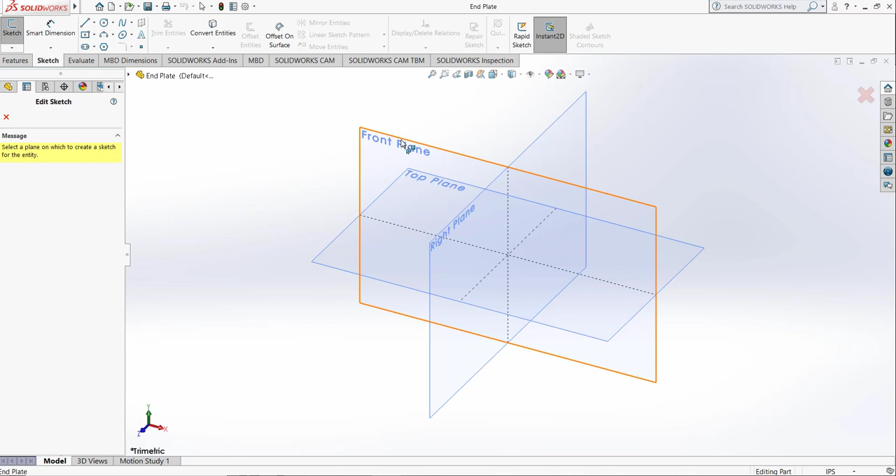Start the sketching and I am going to select the front plane, and then go to corner rectangle, and draw a rectangle like that. This is a simple work.

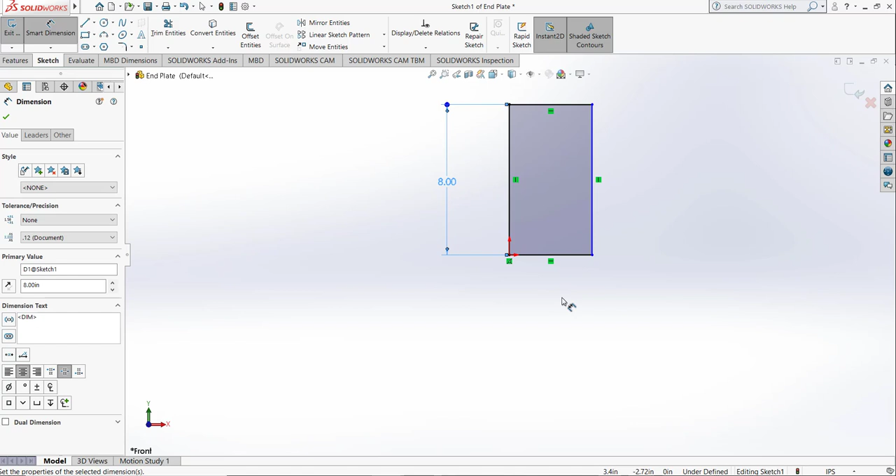Then add the dimensions. So this dimension is given as 8 inches, this dimension is 3 inches, and 2 circles we are going to draw, and then assign the dimensions.

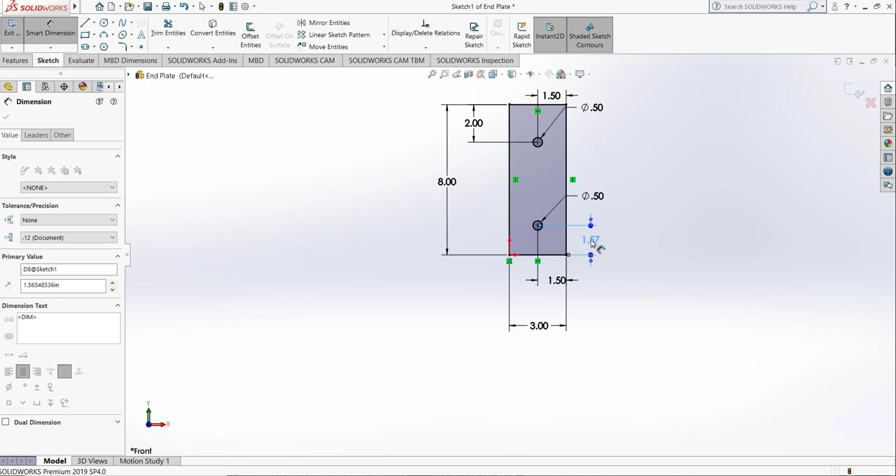So our sketch is complete. Exit the sketch, go to features and use the extrude base boss, and this dimension is given as 0.5 inches. Check mark, and the end plate design is done. Save it, and then we are going to create the drawing from this part.

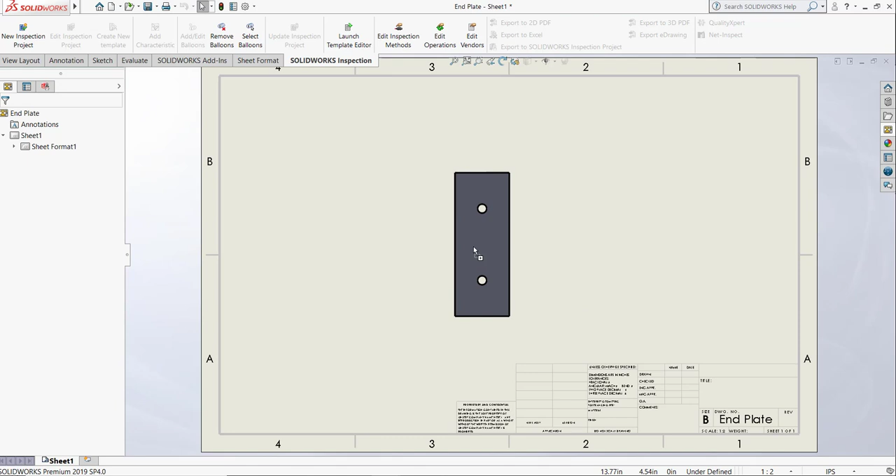I am going to select the B landscape, click OK. I am going to select the front plane and then right plane. When I move my mouse here, I am going to put the isometric view here and just drag this view, keep it here and change the display style.

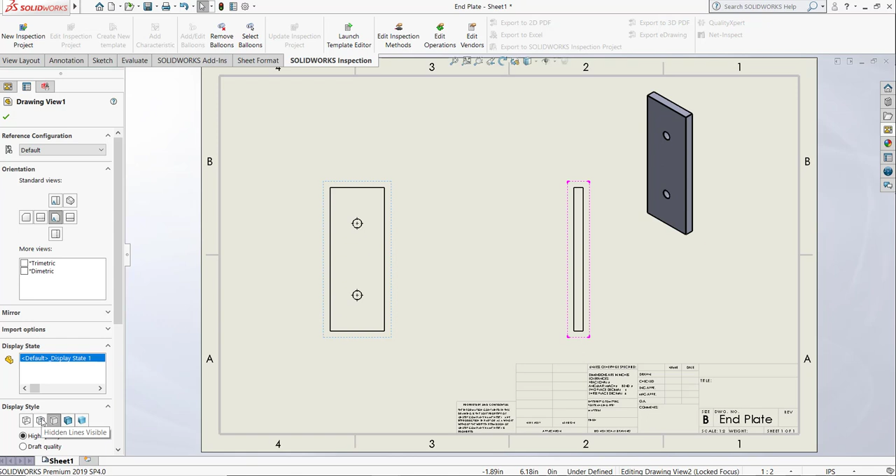Just drag it here, select this view and make the hidden line visible display style, and go to sketching, smart dimensions, and just dimension the design.

So we just made the drawings of end plate. Save it. Now this end plate design is done.

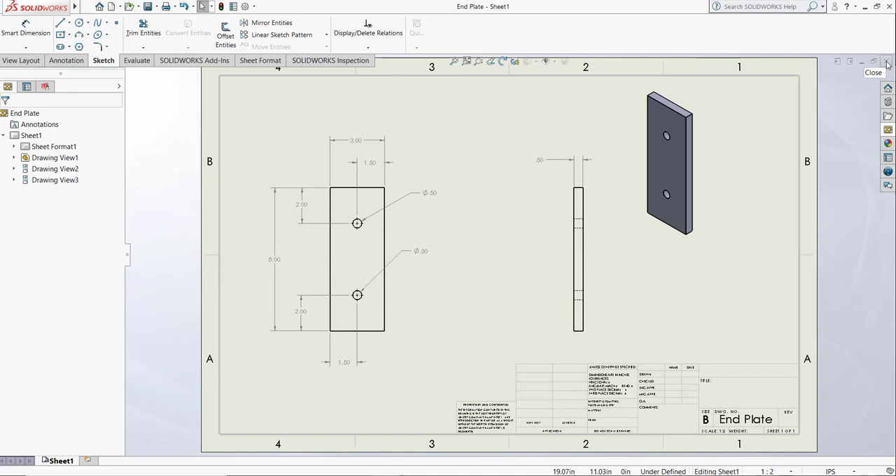Now we are going to make the roller shaft. So open the sketching on right plane. Draw a simple circle,

and now we are going to define the dimensions of this circle. So radial dimension is given as 1.5, and we are going to add the diametral dimension. It will be double, it will be 3.

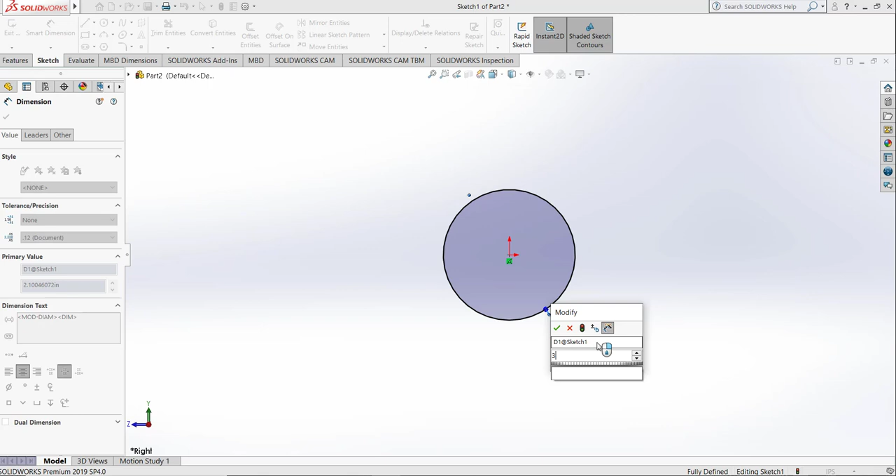Then draw a line, just a horizontal line like that, and give the dimensions. This dimension is given as 1.125, and trim, use the power trim to trim these areas, or you can trim it like that.

This dimension is given as 1.125, and trim, instead of using the power trim, you can use trim to closest and trim these extended areas which you don't need, and exit the sketch.

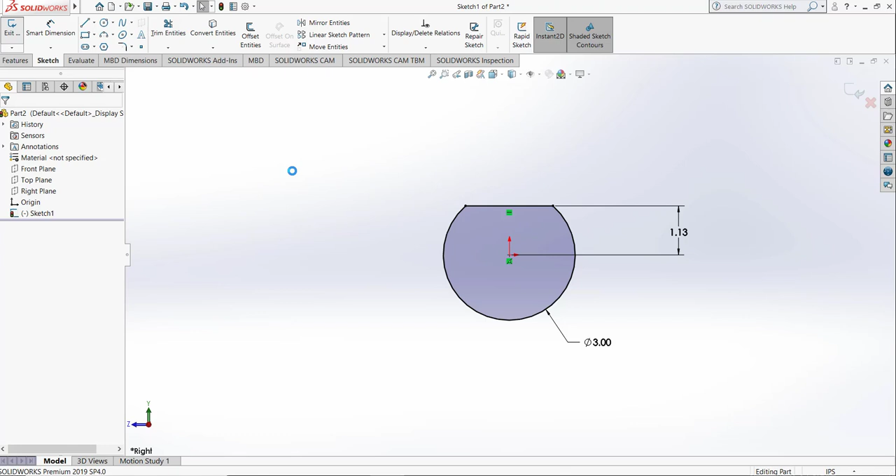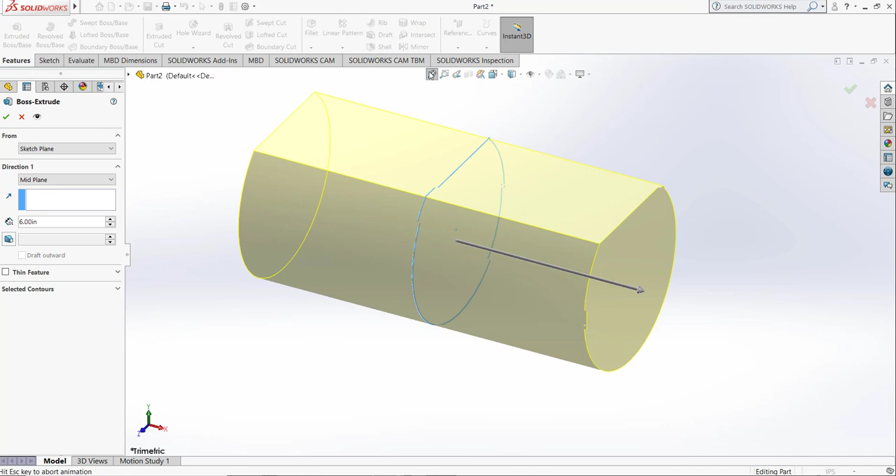Then we are going to use the extrude tool and dimension it to 6, and it's better if for the end condition, direction 1 end condition, you select the mid plane and give this dimension 6, so it will extrude it half in this direction and half in this direction, and our right plane will be in the middle. The sketching plane is in the middle.

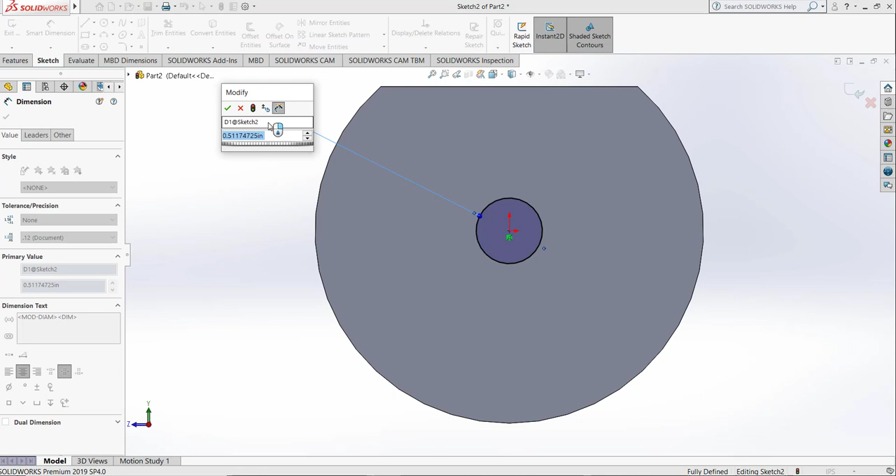Open the sketching on this face, make it normal to you, draw a circle like that, and this dimension is given as 0.5. Exit it.

So the total dimension for these two shafts is 8. From this surface it's 1, so extrude this for the dimension of 1, and end condition is blind. And we can use mirror tool to mirror this feature.

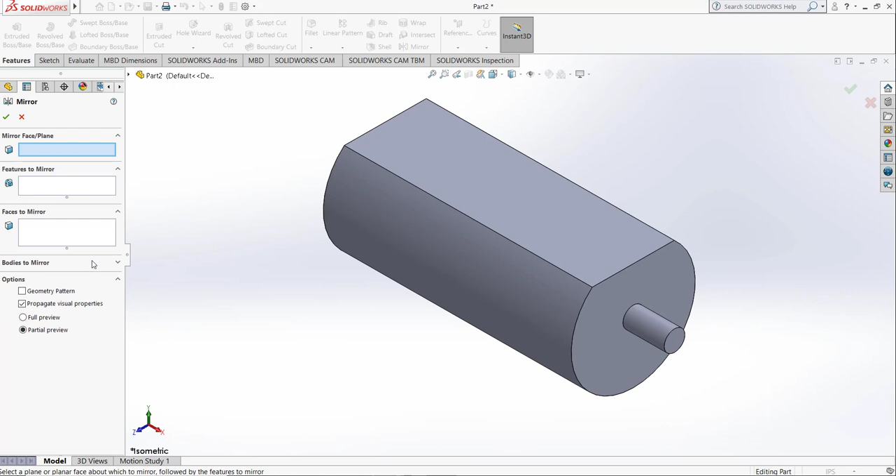In the selection mirror face plane, select the right plane, and for features to mirror, select this shaft we just extruded. So this way you can see it's added. Now just save this one with the name of roller shaft.

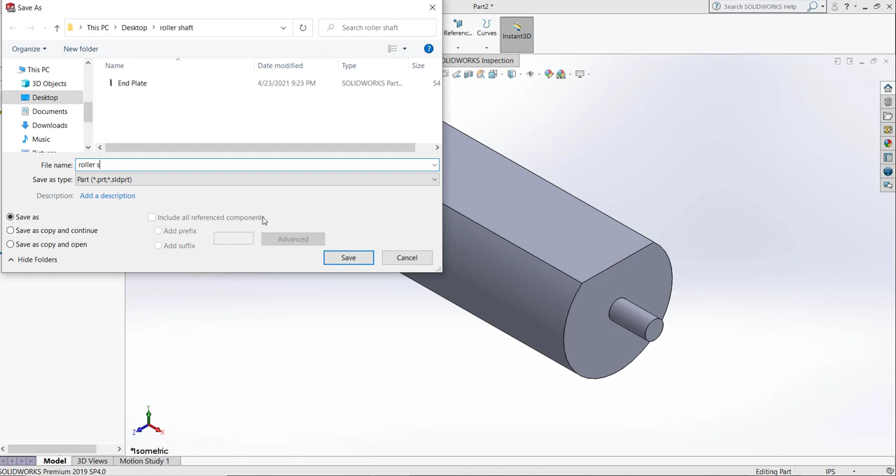And we are going to make the drawings. B landscape, click OK. We are going to put the front like that, and right plane and isometric view.

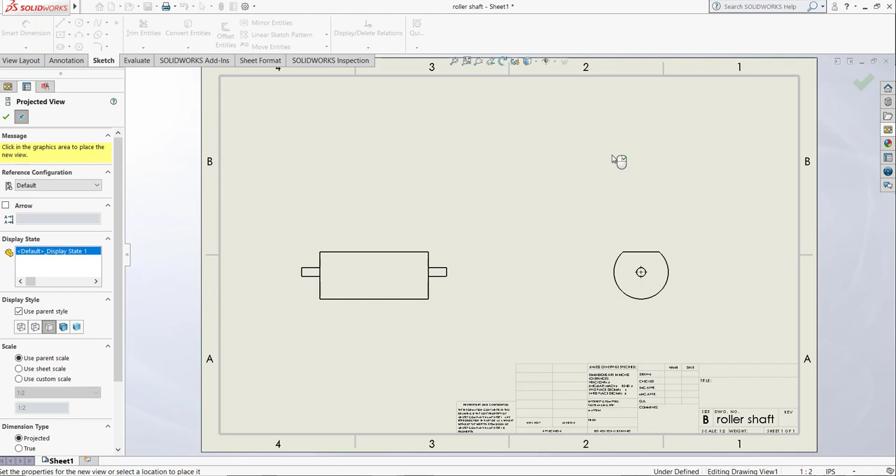And for this view display style, make sure to shade it with edges, and drag it and place it like that.

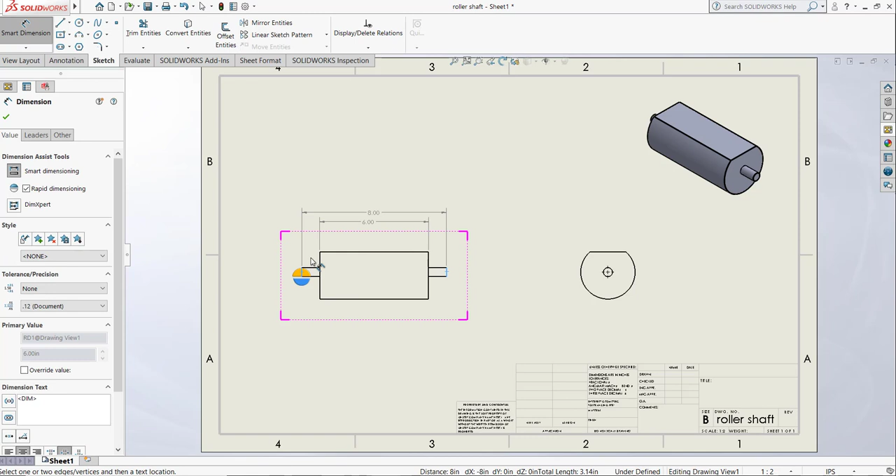Now I am going to use the dimensions. So from here to here, this dimension is given as, from here to here, this dimension is given as, from here to this side, this dimension is given as like that. From here...

Or you can go here under the document properties units, and for the decimals of length, change this one too. So this shaft, roller shaft drawing is done.

Now the two parts we just made, we needed to put together in the assembly. So select the assembly, click OK.

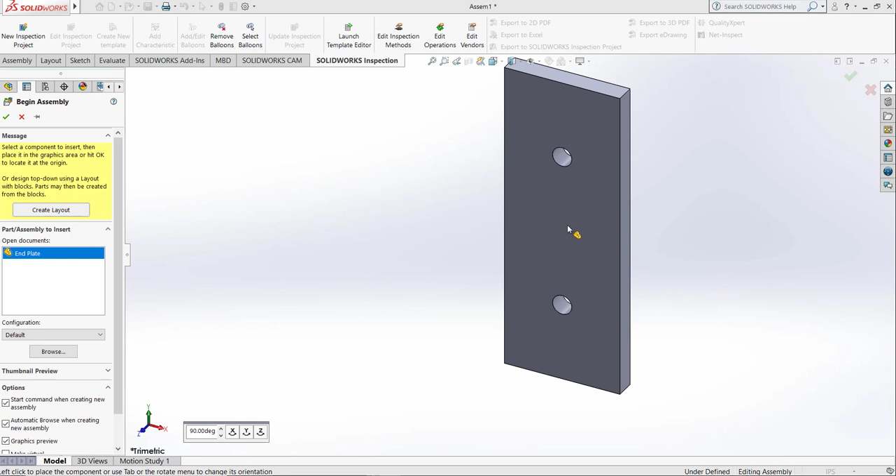So first I am going to put the end plate like that, and we just needed to change the rotate in Y direction and place it like that.

Then again we needed to select the end plate and use this Y and place like that.

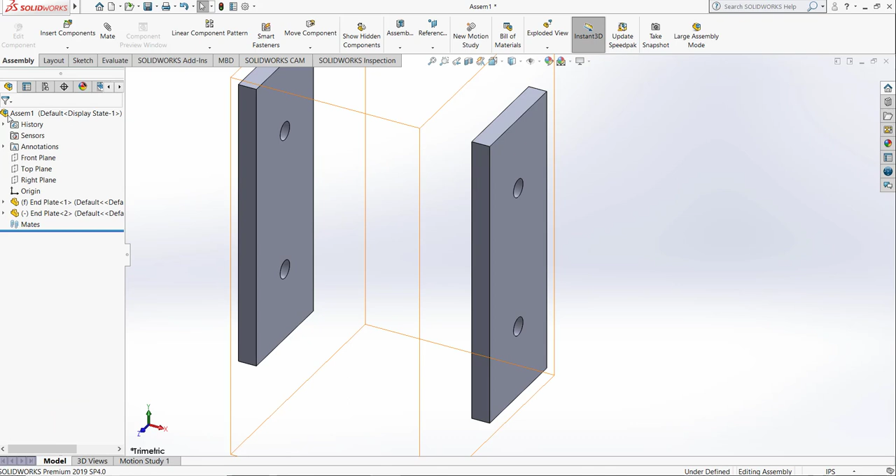Then I am going to put the roller shaft, so 2 plates and 2 shafts, and select the mate. I am going to select this surface and this surface, and it will add a concentric mate.

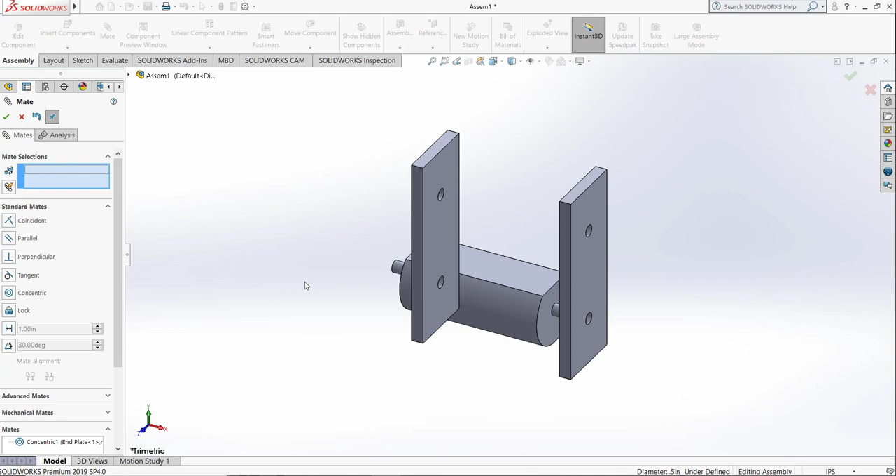And again this surface you can rotate. If this surface is not visible to do, you can rotate like that. Select this cylindrical surface, rotate like that, and select this cylindrical surface of the hole.

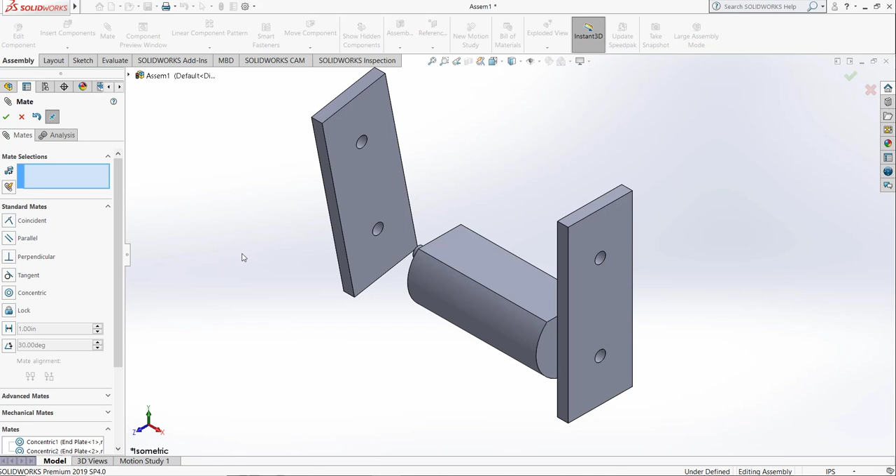Now I am going to select this surface and rotate and select this surface, so it will add a coincident mate between them. And same way select this surface and this surface, and it will add the mate.

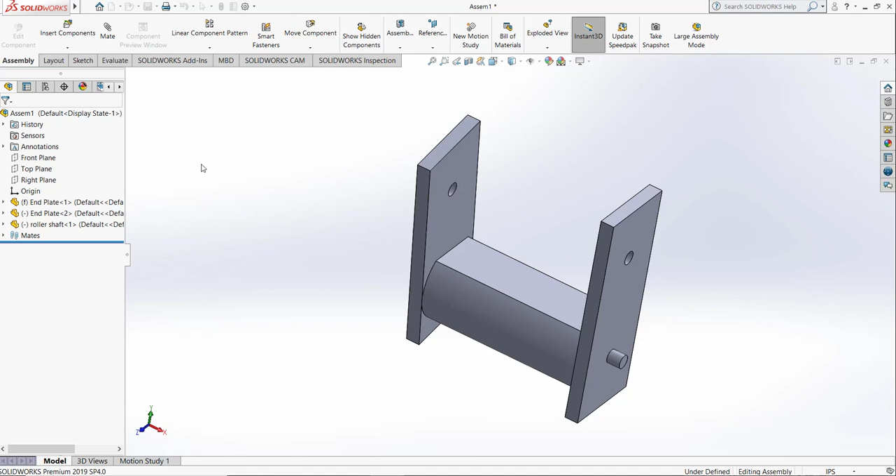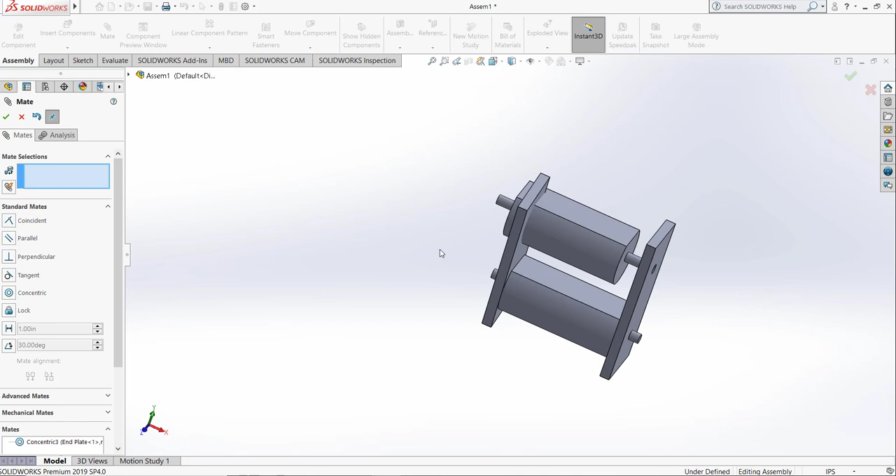Select the roller shaft once again, add it, go to mate, select this surface and this hole surface, and again we needed to move it in that direction. Just select this plate and rotate it like that, so this hole must be visible, and select this one and select this surface.

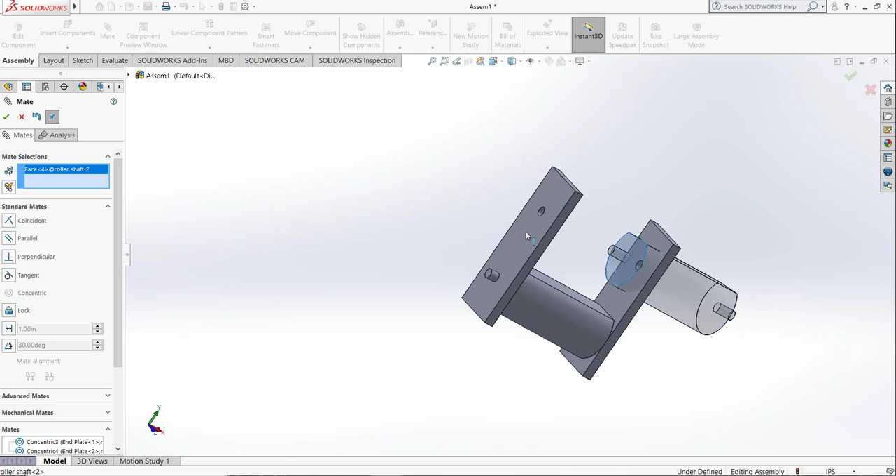And now when you hold it and drag it, it will rotate like that. We needed to fix that, so I am going to select this surface and this surface, so it will make it coincident. Now you can rotate it, but you cannot drag it in the other directions.

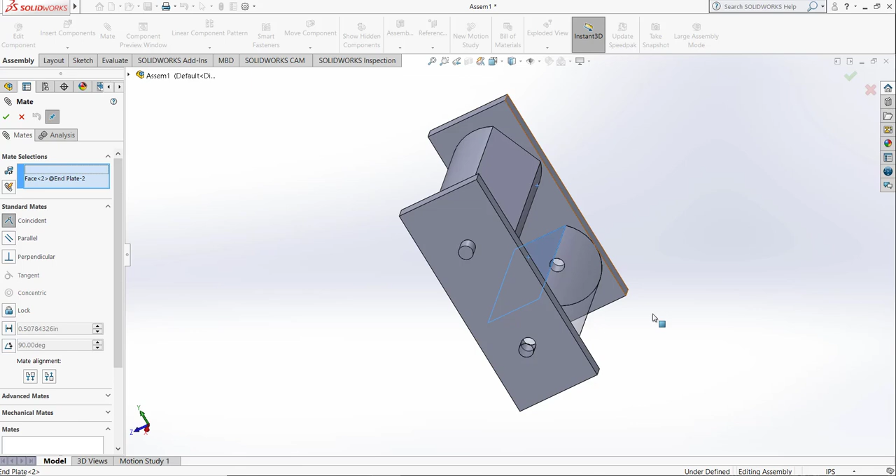Next, go here, we needed to select the mate. I am going to select this top surface of the bottom roller and this surface, this one, and you can see it will add a parallel relation between them.

And you see this is facing in that direction, but we wanted that in the other direction, so just go here, mate alignment, change that, so you can see this surface is now in the other direction like that.

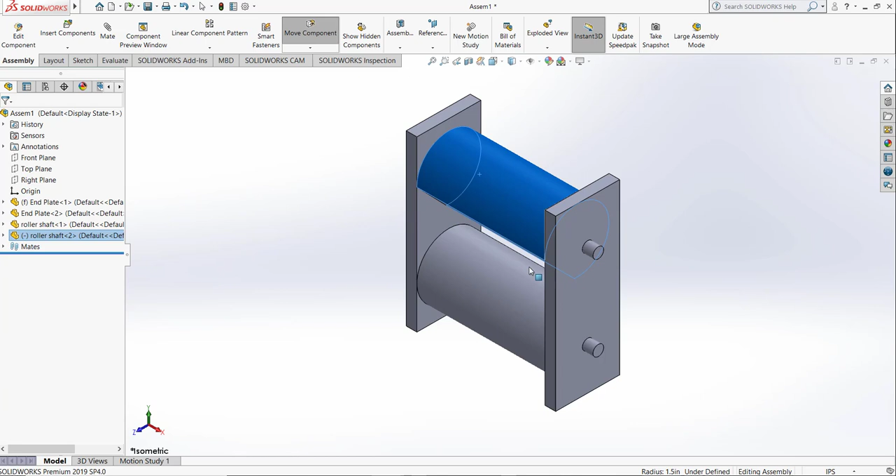Now you see this is fully constrained, you are not able to rotate it, but the top roller you can rotate it. Just make it like that. So now this assembly design is done.

Save it, rebuild and save. Go here to plate, roller, shaft, assembly.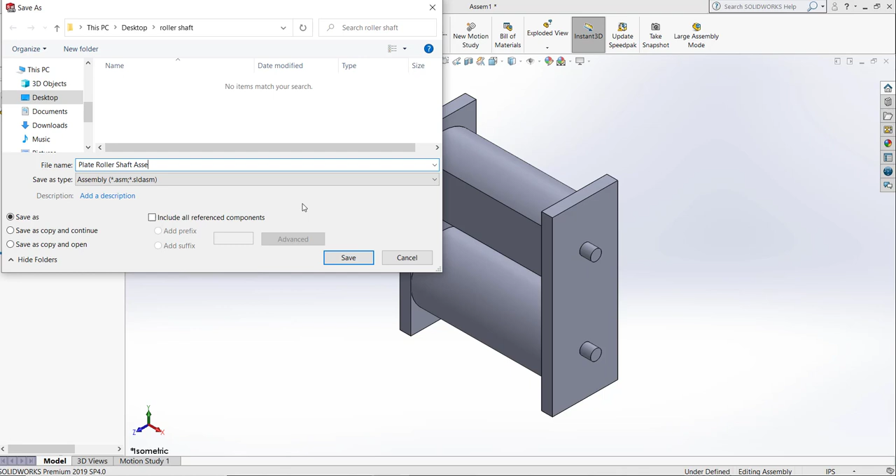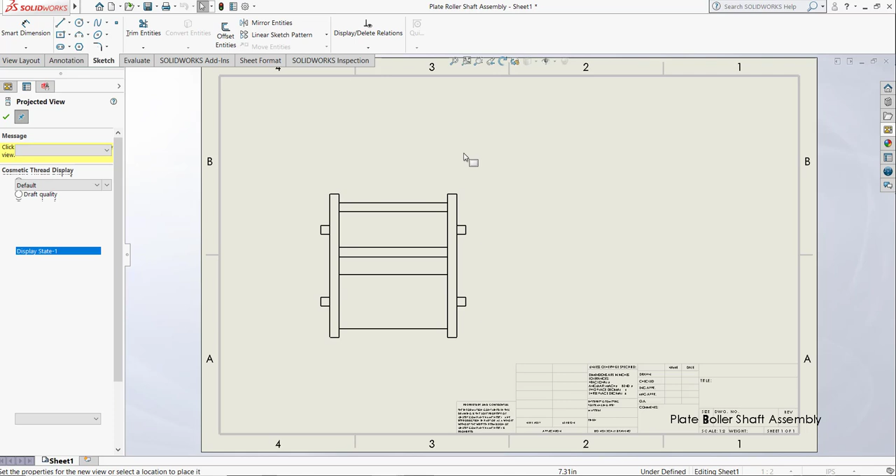Save it, go to make drawing from assembly, select the B landscape, and we just put the front view here and an isometric view like that.

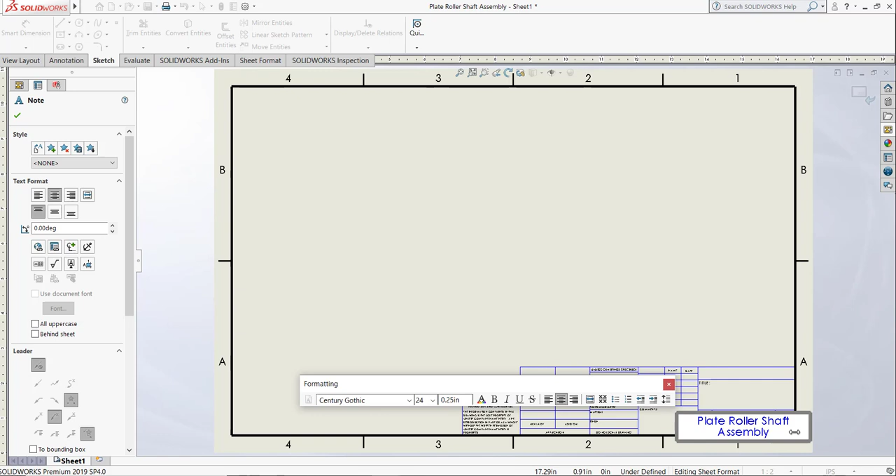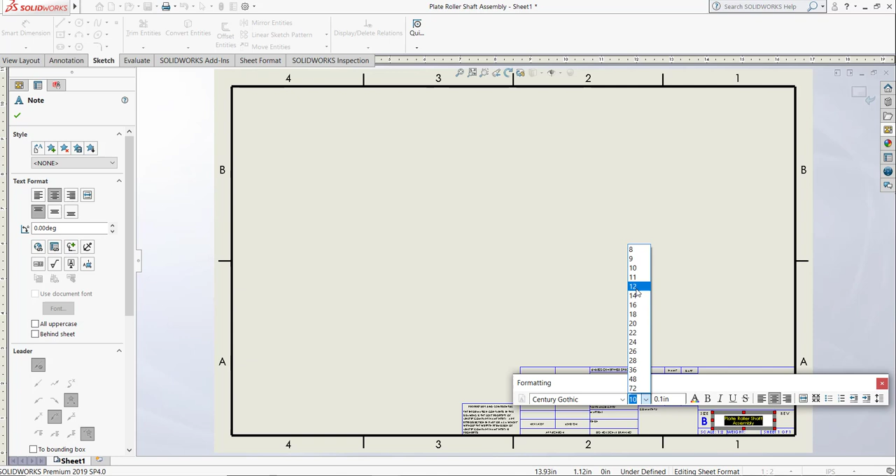Just drag this one in this position, make it like that, go to edit sheet format, drag it like that, change the font size to 10, like that.

Go to view, annotations and bill of material. Select bill of material, select this view and click OK, and this box will appear.

Make it like that, and under the description you can double click on it, break link and put the name or any description, like put it end plate, and do same for this roller shaft.

Auto balloons. So this bill of materials gives the information of our assembly. So end plate we are using 2 quantity, and roller shaft we are using 2 quantity, and item number here tells which one is which.

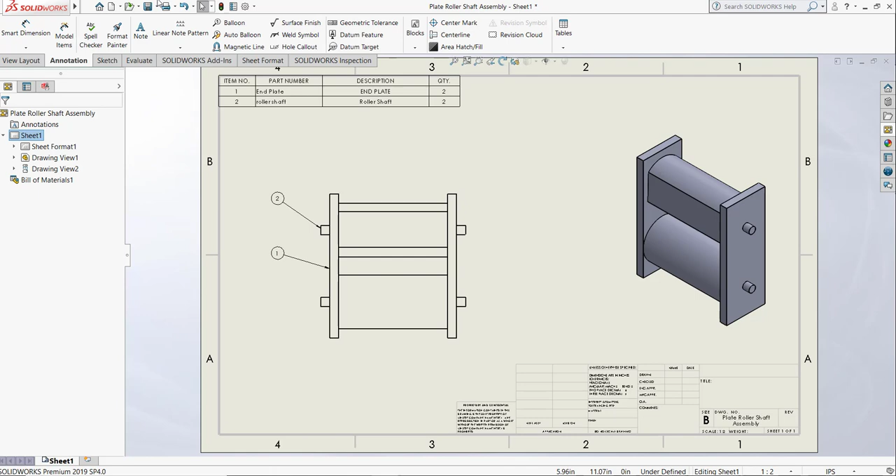Save it, and now our work is complete.